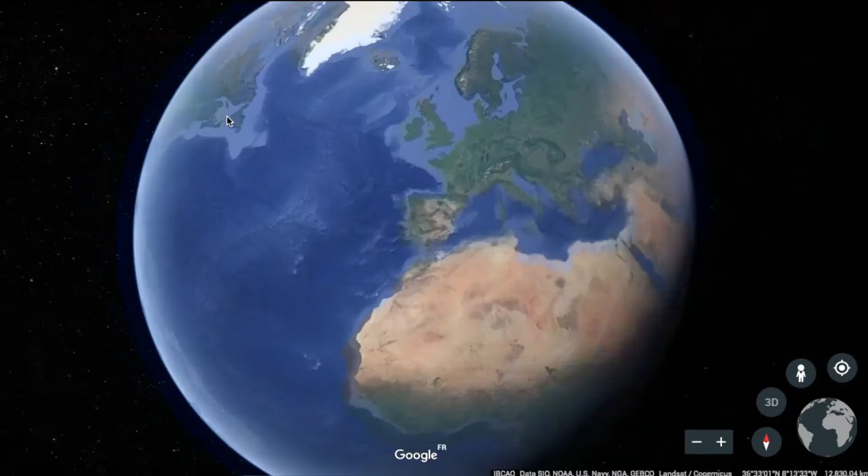My name is Ian Craig. I'm from the University of Pretoria in South Africa, and it gives me great pleasure to introduce our first plenary speaker for IFAC 2017, Professor Iven Mareels. He is the Dean of the School of Engineering at the University of Melbourne.

He obtained his Master's in Electromechanical Engineering from Ghent University in Belgium, and the PhD in Systems Engineering from the Australian National University. He received civil honors for his work in engineering, education and research: in 2013, the Commander in the Order of the Crown from Belgium, and in 2003, the Centenary Medal from Australia. And in addition, he's won a number of awards.

In 2017, just the other night, he received the IFAC Harold Chestnut Textbook Prize. In 2014, he received the IEEE CSS Control Technology Award for work that he's going to talk about this morning. And then in 2013, the Asian Control Association Education Award.

Iven is very closely associated with IFAC. He was the technical board chair and vice president of IFAC for 6 years. He's also an IFAC fellow, an IFAC advisor. And furthermore, he's a fellow of the Academy of Technology, Sciences and Engineering in Australia, the IEEE, and also Engineers Australia. And then furthermore, he's registered as a professional engineer with Engineers Australia.

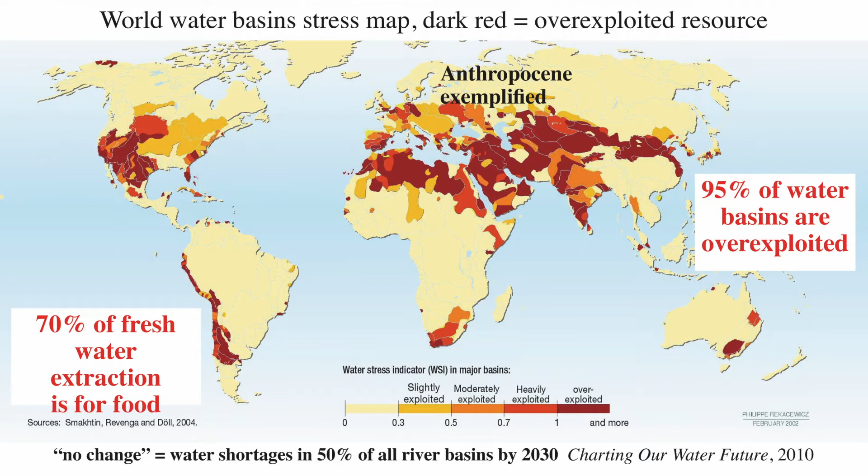The talk today is about this map, essentially. It's a map that represents the water stress in the basins around the world, and the darker the red, the worse you're off. And you can see that there's a rather large amount of red on that map. And if you ever wondered why we sometimes call this era the Anthropocene Age, I think this map more or less tells the story. 95% of all the river basins in the world are being overexploited. Some of them are really overexploited. More than 50% to twice as much water is extracted from them as nature can actually provide.

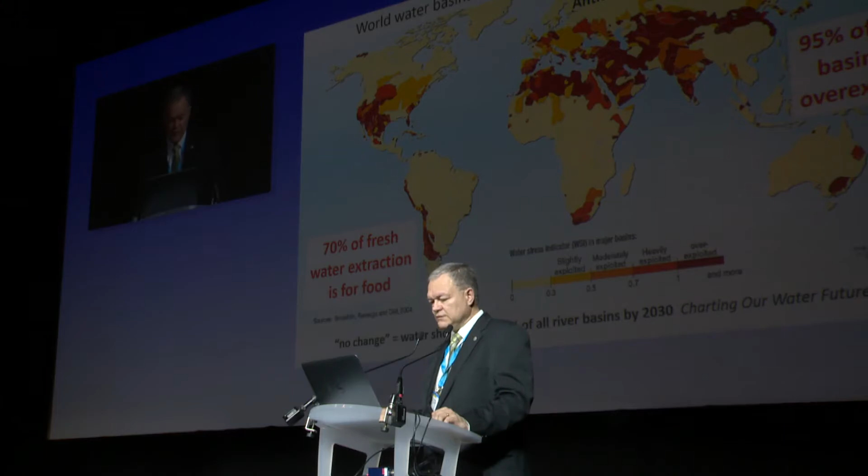Most of that water, actually 70% of that, goes into our food. And so, in a nutshell, if we can't change this picture, we are going to significantly go into trouble. Actually, the 2030 Water Report tells us that about 50% of our river basins will have significant water shortages, and it predicts 50% of the world population to be in the same space as a consequence. So this talk, in a way, is about systems engineering to reduce water stress.

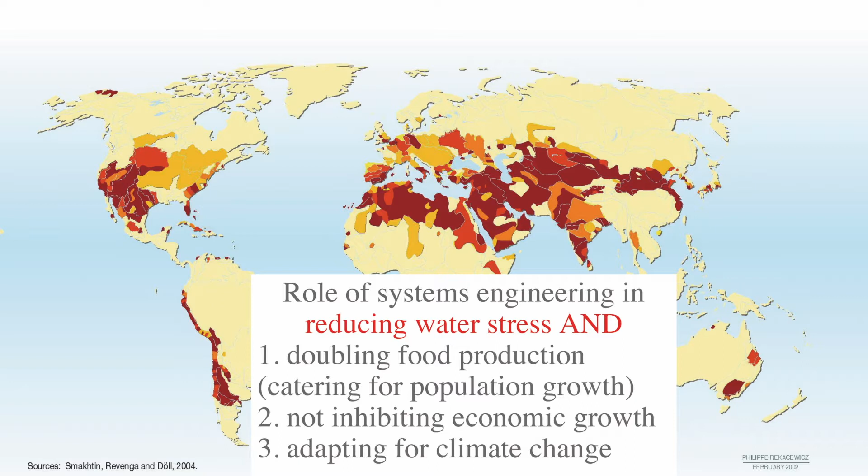But that in itself is a goal that you can never get any money for or be funded for. What you can do is to focus on the reasons why you want the water and reduce the water stress. In the first instance, we want to have twice as much food as what we have now, in large part due to population growth. You want to do that in a way that it doesn't cost the economy too much, otherwise, you impede economic growth and other priorities will take over. And finally, it's very appropriate to think about that. The rain comes from the sky. Sky is influenced by climate change. So how do you adapt and make this whole thing resilient to climate change?

So my key messages for today, if you don't remember anything from the talk except these, would be fantastic, is that actually our system thinking, the feedback and control that we do in our community, can make a difference on the geoscale engineering space. And we can see it as a positive force in the Anthropocene era. A maybe negative message, but a message that is important nevertheless, is that you can't have impact unless you can unlock the productivity key in your era.

And the most exciting, I think, is that we as a community have a most fantastic time in front of us. I think from all the time that I've been with the IFAC community, it's now almost 30 years, this is the most exciting time. The opportunities that we have in front of us to create autonomous behaviors using a combination of sensors, communication systems, computation systems, actuators, and the physical environment, and not to forget the human in the loop, has never been as large as today. And in some small sense, this talk will illustrate what you can do in this context in the area of irrigation and agribusiness.

I'll have a small video to try to introduce you to the topic of irrigation. It's about this area here. I live in Australia, somewhere south, 24 hours flying from here, in this little green area. I think you can, my map, you can't see my mouse. That's interesting.

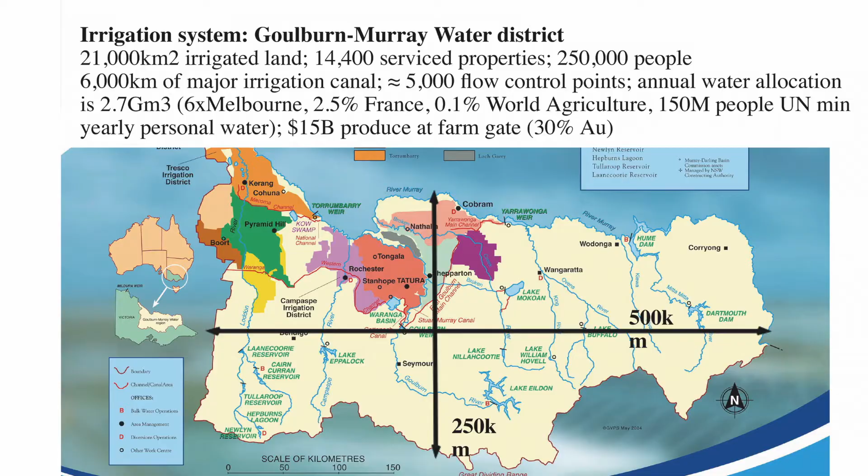6,000 kilometers of irrigation channel. It's a medium-sized system. There are systems with 40,000 kilometers of channel in the world, and it uses about 2.7 gigacubic meters of water a year. That doesn't mean much to me, but it's 6 times the city of Melbourne, about 2.5% of what France uses, and it represents about 0.1% of the world's water agriculture.

Nevertheless, according to the United Nations, you can supply 150 million people with their yearly water supply using that amount of water. And from an economic point of view, it's about 30% of Australia's total produce at farm gate, about $15 billion. So it's about that system that you're going to see a small video that will try to explain what we're talking about.

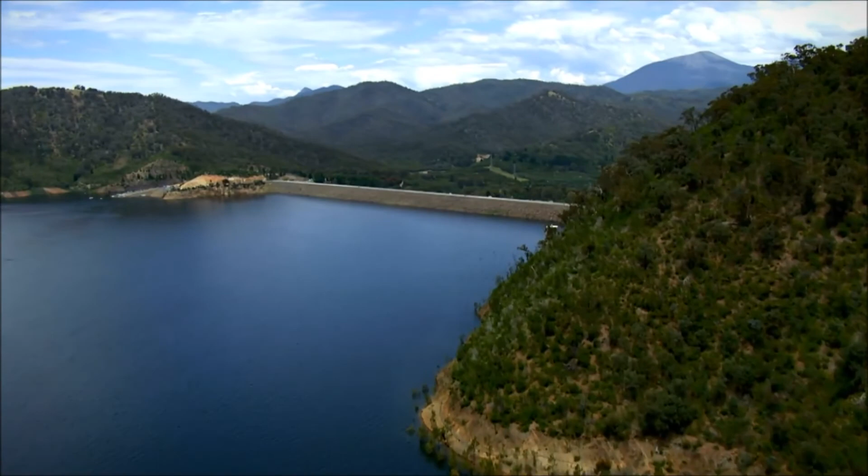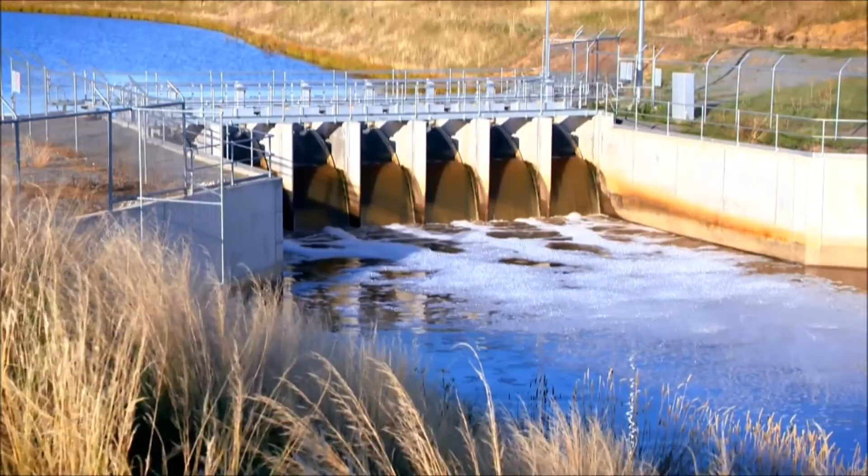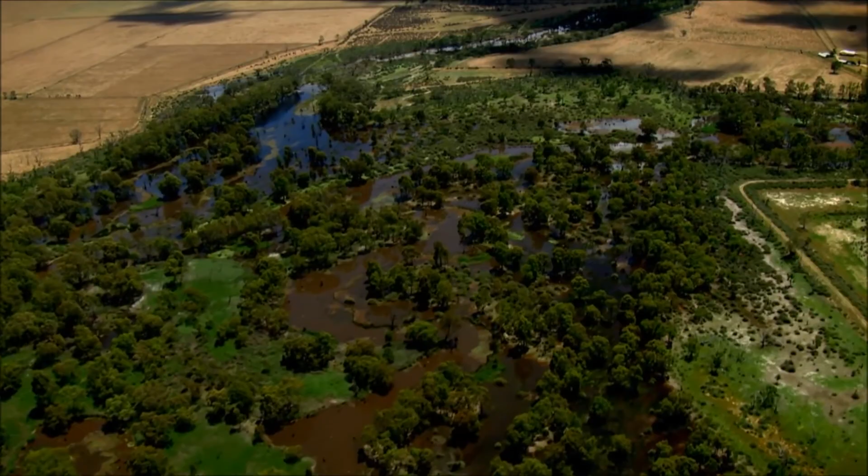Smartwater Technology is revolutionizing the operation and management of open canal irrigation water distribution systems around the world, reducing the massive amounts of water lost in transit from storage to farms. Using the world's limited water resources efficiently is becoming increasingly important as the world faces scarcity in many regions. With 70% of the world's fresh water used for irrigation, authorities are looking to reduce water lost in inefficient irrigation infrastructure. In Australia and around the world, canal automation is being implemented to reduce these losses and secure more water for productive uses. In one of the leading projects of its type, the Northern Victoria Irrigation Renewal Project, or NVIRP, is underway in Australia's Murray-Darling Basin. It will secure the future productivity of Victoria's food bowl irrigated agricultural region, while delivering major environmental benefits.

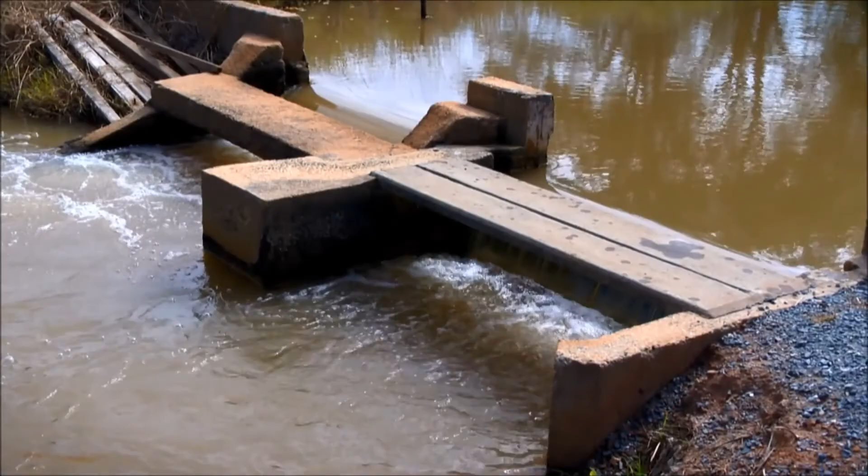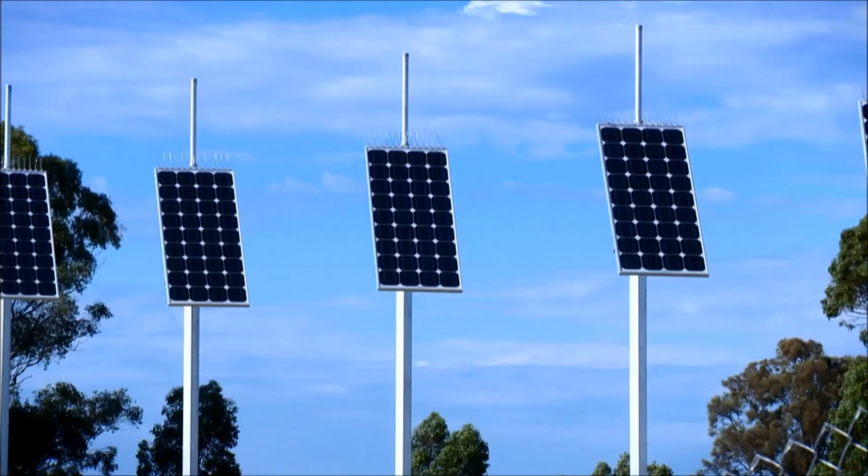The project is automating Goulburn Murray Irrigation District's 6,000 kilometres of canals, and together with targeted remediation and rationalisation, it will see over 425 gigalitres of water saved each year, a figure similar to the amount of water consumed by the City of Melbourne's 3 million inhabitants. Previously, the district was losing massive amounts of water through leakage and seepage, inaccurate metering, and poor control that results from manual operation. It is now being transformed into a modern and efficient supply system that makes the best use of precious water resources.

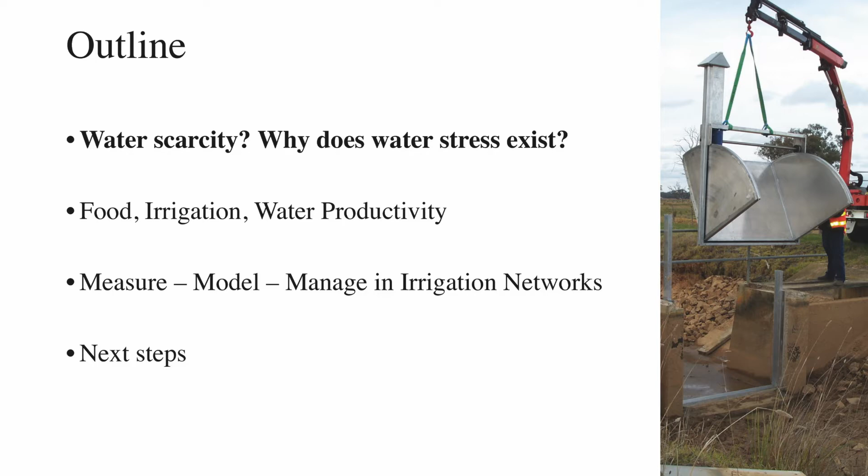So, first of all, I would like to set straight that there is no water scarcity on Earth, so I'll talk a little bit about that. Then we look at what irrigation does and what we can do with irrigation through measure, model, manage, and then maybe look at some next steps as time permits. So first of all, there is plenty of water on Earth. After all, it's called the blue planet. There is no such thing as physical water scarcity.

To just put it in context, if we could only use water once and then throw it away, it couldn't be used again, our society, as it is now, could go on for 10,000 years. And we would not run out of fresh water. And if you had run out of the fresh water, then you could use your brackish water, translate it to fresh water, and then you had enough for another 100 million years. So that's the amount of water that's available.

And given that we never destroy it in normal circumstances, we have plenty of water to work for. So any talk about water scarcity, like what that map suggests, is actually evidence of mismanagement. We take water for granted and we don't invest enough in it. So we see actually economic and regulatory failures in a systemic way.

The other thing to remember is that, of course, this is of the whole world. It's not always easy to get the water from where you want, so spatial and temporal effects are very important. And after all, that's what irrigation is about. It's about changing the temporal vagaries of rain into something that's more reliable, both in space and time. And you want, of course, to look after people. The affluence of people makes a big difference in the way the diet is going to move from vegetarian to more meat diet, and of course, climate change.

The 2030 World Water Group report came out in 2010. It's probably still the main document that indicates the economic failure in the market, and indicates a significant shortage of supply if we continue under the no-change scenario. That's the no-change scenario here. You can see about 4,500 cubic kilometers of water being used, 12% domestic, 18% industrial, 70% agricultural. And that's going to move to about 6,900 cubic kilometers under normal circumstances.

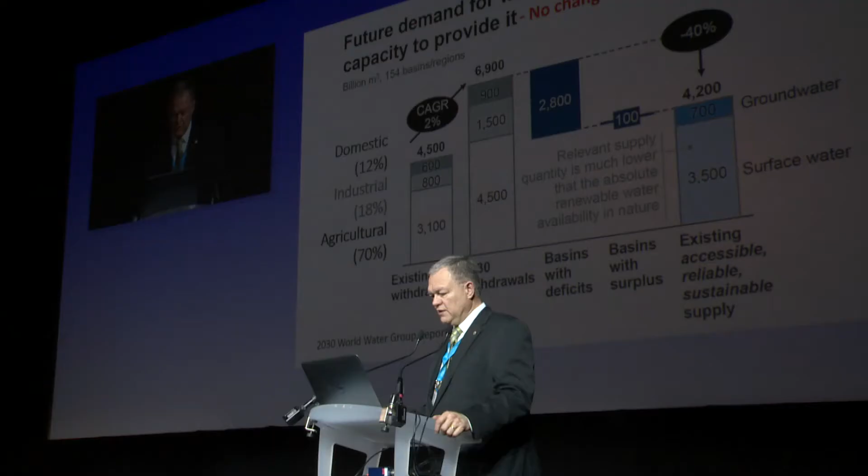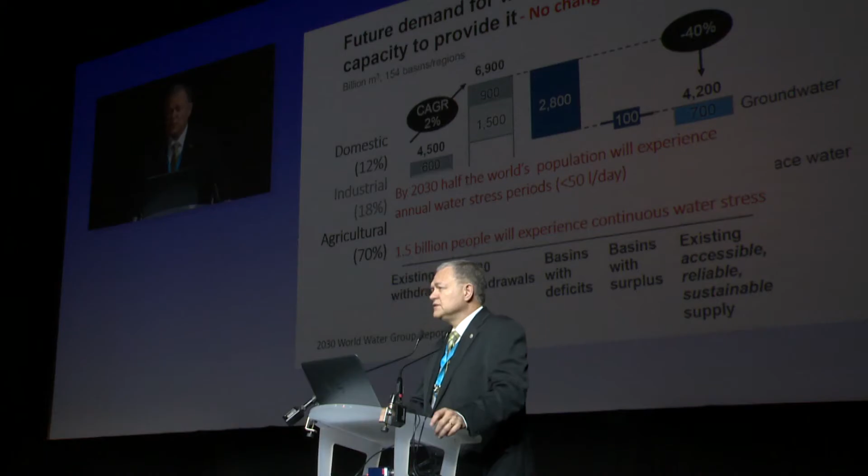So the bad part of that is that by 2030, according to these predictions, half the world's population will experience what is called annual water stress. There are periods of at least a month in duration where the average person will have less than 50 liters per day available. So normally, if you live in New York, you use 500 liters a day. If you live in Melbourne, you use about 300 liters a day. So that's roughly 6 times less than what we are used to in the Western world.

And worse, it makes a mockery of the United Nations millennium goals. At this point in time, we have 1 billion people that have continuous water shortage and water stress. By this model, it would go to 1.5 billion by 2030. So food is the most important part of that, because 70% of all the water extractions from the environment go to food production. And if you look at what we need in food, over the next 25 years, humankind will produce more food than it ever has produced in its entire history.

There are about 3 models that say roughly the same. The IIASA model, which is kind of interesting, it's the International Institute for Applied Systems Analysis. They claim that we need 100% more food per annum and 100% more calories. Babcock at Iowa State University claims it's 100% more food, but not as many calories. He claims more vegetarians than meat eaters than the IIASA model does. And the European Bank is the most optimistic in a way. They think that we can get away with only 60% more food and 60% more calories, and that's in line with the 2030 World Water Group report.

But underlying all of these models is one rather remarkable fact, that we don't have any more water, and so all of this productivity gain in food we have to do with just the amount of water we use today. And that has never happened in the history of our planet. So the question is, is it feasible, or is it just wishful thinking? Well, luckily, nobody really cared about water. So the opportunities are large.

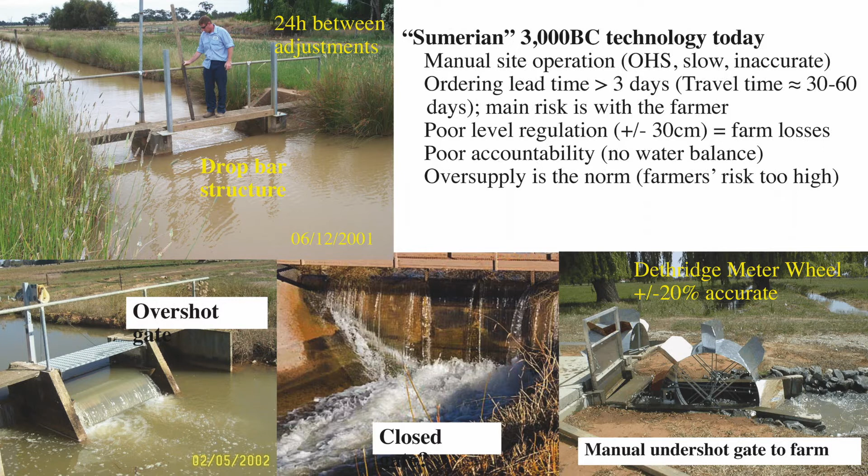And that's related to the fact that these systems are large. It takes a drop of water coming from a dam to your farm 30, 60 days in cases, sometimes 3 months. So despite the fact we've reduced the risk, and that's why we build the irrigation system, the risk remains with the farmer.

On top of that, most systems have very poor level regulation. That is bad because if there is too much water in the channels, because it is gravity fed, the water flows further and therefore you lose water on your farm. It actually goes to the drain rather than on the farm. And if you don't have enough water, it doesn't go far enough and you get mud holes on your farm rather than a nicely spread out farm. So level regulation is actually the most important quality of service that you have to do in flood irrigation.

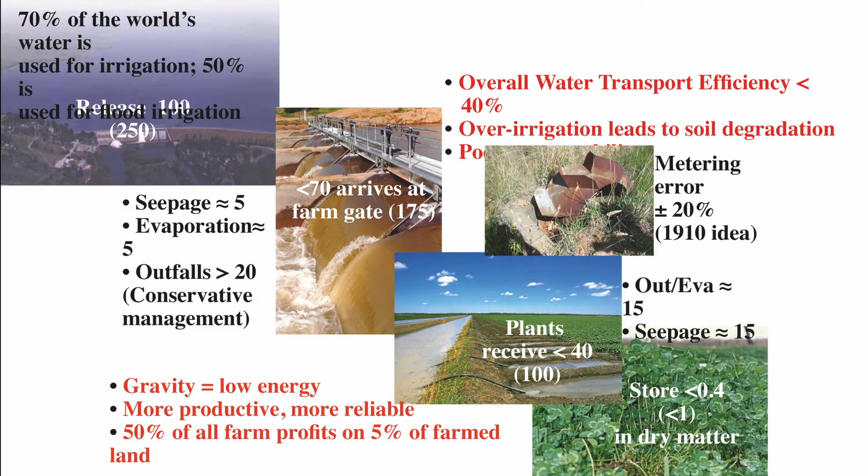And then nobody really knows how much water is in these systems. So there's very poor accountability, and you get this fighting between ecologists and farmers non-stop as a consequence. So in a nutshell, if you look at the top system, you take some water out of a dam, say 100 units of water, and less than 70, and I'm optimistic here because in most countries it's less than 30, arrives at the gate of the farm. And then because we don't time it properly, the farmer loses another 30% at least, so we roughly get 40% of the water to the plants.

And then a plant can only store about 1% of that water due to the normal cycle of breathing, essentially. That's how we actually get our water into our food and our clothing. We're doing it that way because it doesn't cost us any energy, it's very cheap, the sun does all the heavy lifting, and because of this mechanism, we do have more reliable water supply and therefore better productivity. In fact, across the world, 50% of all farm profit comes from only 5% of the farm land, and that 5% is the irrigated land.

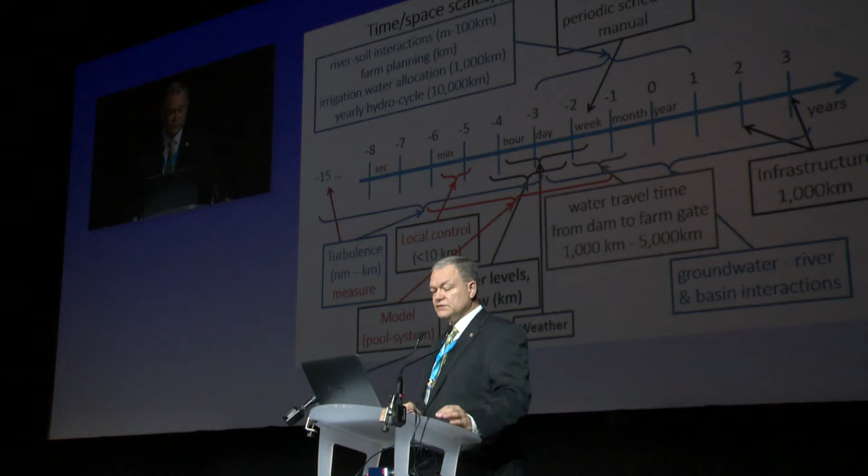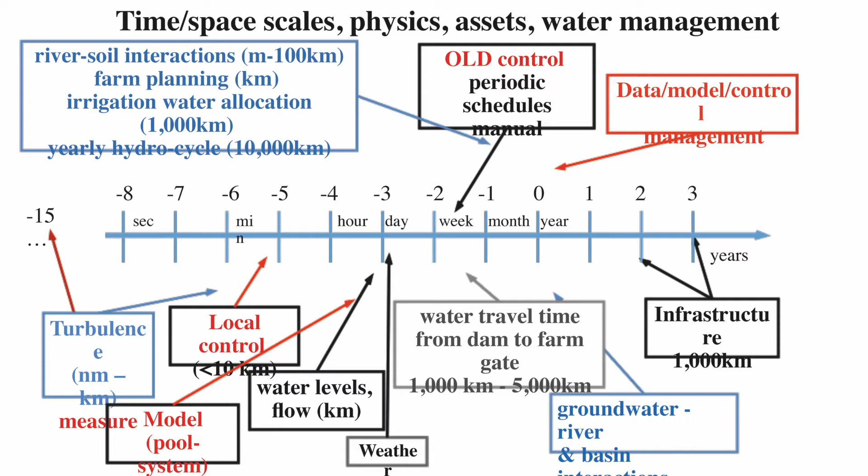And our control strategy will be to focus on the water level regulation and get that right, and that is intervention in the order of minutes, essentially. So all this tells you basically that there's opportunity here for us to do something. And then we have to manage it all and make results out of it on a long-term basis, and for management it's actually important that we get data-based, evidence-based information about the economics of farming.

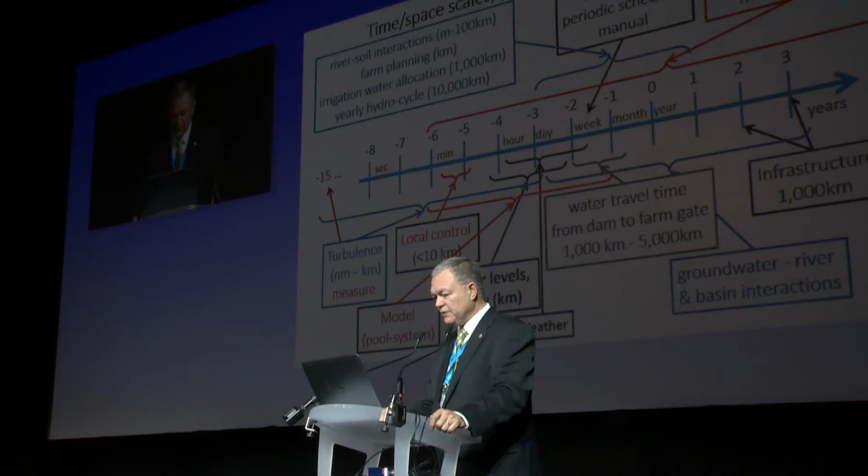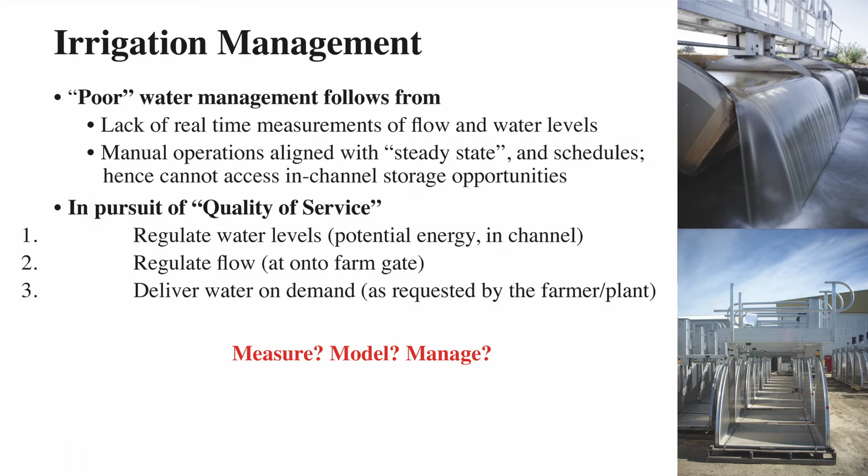So in a nutshell, poor water management actually comes from the fact we don't know where it is, so we don't measure what we want to manage. And we have manual operations that look at steady state rather than at dynamics. So we can never take an opportunity like what is in storage in the channel and make it available to us, because there is simply no control to make it relevant.

What we want to do is regulate the water level so that the farmer has the right amount of water on his farm and doesn't lose it. We want to regulate the flow from the channel into the farm gate, and that's particularly important when the farmer has already invested in pumping infrastructure. And we want to, most importantly, give the water when the plants need it. So I would call that watering on demand, not on a schedule basis. And that's what we're going to try to achieve.

For that, we have to bring in some new measurement devices to make this work. And our team has worked on these gates that are both an actuator, we can close them, change the flow, and as well a relatively accurate flow and level sensor. It's self-calibrating because these things are installed in farming environments, not necessarily a laboratory environment. So there's a lot of thinking that goes in there to make sure that what it measures is actually what you think you're measuring, and that it actually also actuates the way you think it's actuating.

A nice feature of it is that the gain of the controller is super linear, which means that big control actions come a little bit easier than small control actions, which is an important thing because irrigation channels often run at close to full capacity. And a big issue for control will be that these systems are saturating both above and below. You can only get a gate open or close it, and in between, of course.

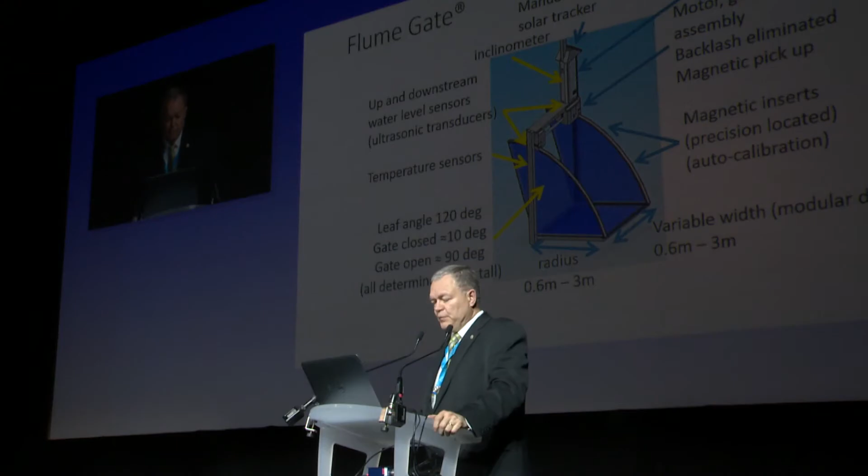In itself, the gate has a lot of measurements for water levels, downstream and upstream. You have temperature sensors for compensating for expansion and temperature effects. You measure extremely accurately the position of the gate, because in the end the flow is a function of the geometry of that gate and the way that the flow operates. And there are quite a few extra devices there to help us eliminate any backlash in the gearbox, etc., to make sure that when we position the gate, we know that we position it the way we wanted it to be positioned.

The ultrasonic, and that's where the very high frequency effects come. In order to measure the water levels, we use ultrasonics, 4 megahertz transducers. We use them left and right of the gate, so there's a bit of redundancy. We can lose a few sensors, but also the redundancy helps us in general to make sure that we know whether the gate is positioned straight or inclines to the left or the right, because that will tell us something about how those measurements work. And then we can compensate for it.

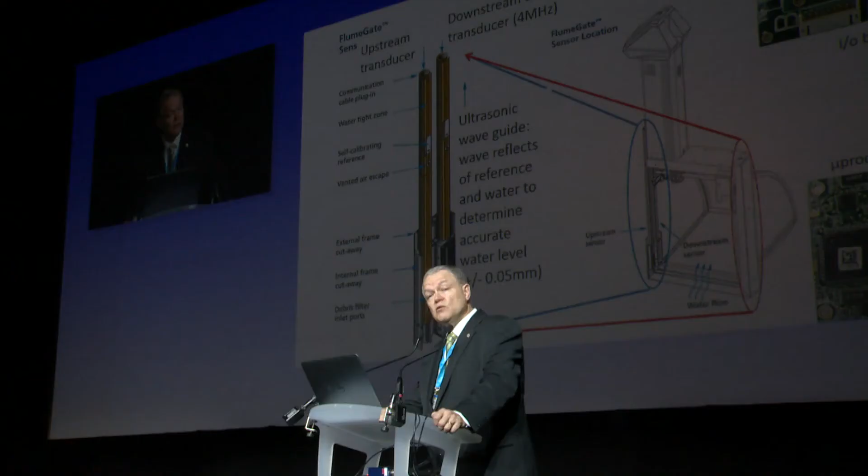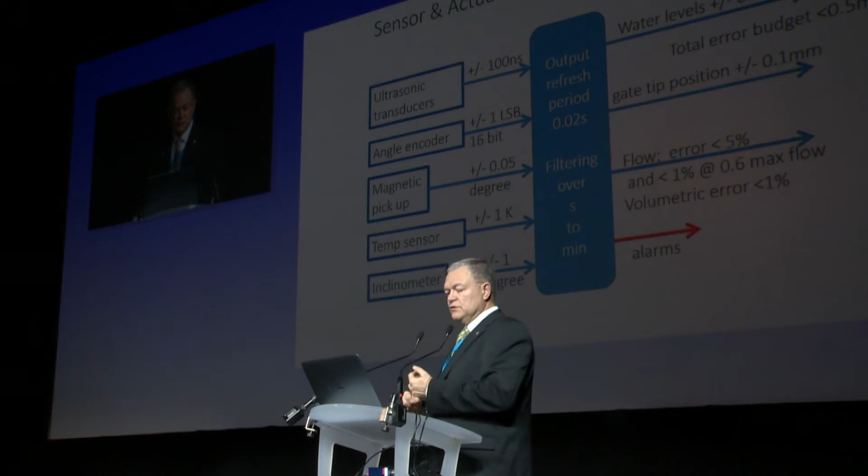And we also compensate for the temperature effect in the speed of sound and so on, in order to make it work. And in the end, we have to make it work to about 0.1 of a millimeter accuracy for the water levels, and that's after we take waves out and things like that, for the average. So we have ultrasonic transducers, angle encoders, magnetic pickups to know that the gate is actually working the way we think it should be working, temperature sensors, inclinometers, and they're just the devices that we use for the actual flow measurements and for the level regulation.

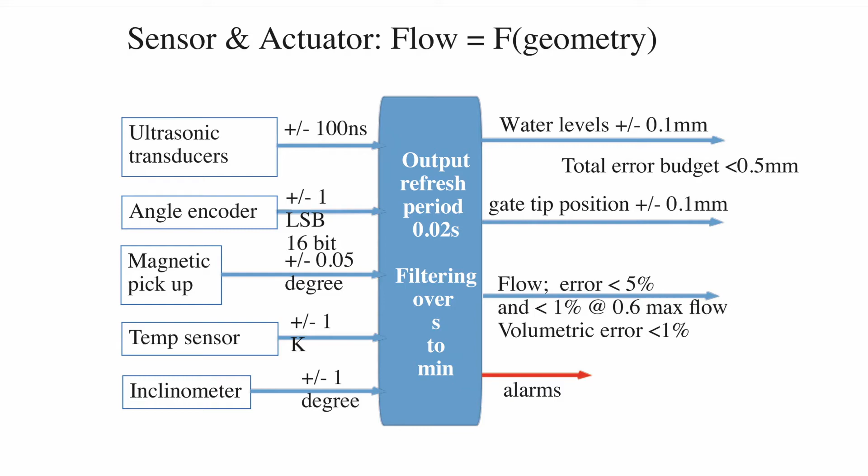There are many more variables that we keep track of with respect to the energy in the battery and the solar radiation that we use also for farming advice. In the end, we can get the flow level to within 5% across the full range, and about 1% or less above 0.6 of the maximum flow rating, which is actually the place where we normally operate. There are all sorts of alarms when things go wrong, because with so many gates in operation, the fact that about 4 or 5% of your gates are having errors or alarming is not unusual.

Once you have that data, you can start thinking about what you should model and how you should model it. And in principle, you go to your textbook and you will pick up the Saint-Venant equations, the shallow water equations. But when you go there, it becomes all a bit complicated and difficult to implement in the field, especially if you start thinking about having to link about 10,000 Saint-Venant equations with all the boundary conditions we don't know, etc. So in the end, we do some gray box modeling that we adaptively track during seasons to make sure that our parameters roughly reflect what is happening.

And what we try to model is essentially the preservation of the potential energy, or if you want, the mass balance equation, roughly the same in this case. And we also look after the first wave, because we don't want waves. Waves are the pest on these channels. They cause all sorts of troubles for maintenance, but they also cause losses that we don't want. So we want to know what the waves are, and we want to avoid them.

We have a bit of a delay on each of these channels, so that is normal, because when we open a gate, the inflow into the next channel, the next pool, will actually affect the downstream water level with a certain delay, which is related to the wave speed on the channels. And we have a relationship between the length and the depth of the channel that tells us about the delay. Unfortunately, nobody knows what those channels really are. The surveying of these channels is probably more than 100 years old. In the meantime, things have changed a little bit. So we have to track that adaptively in order to make this work for us.

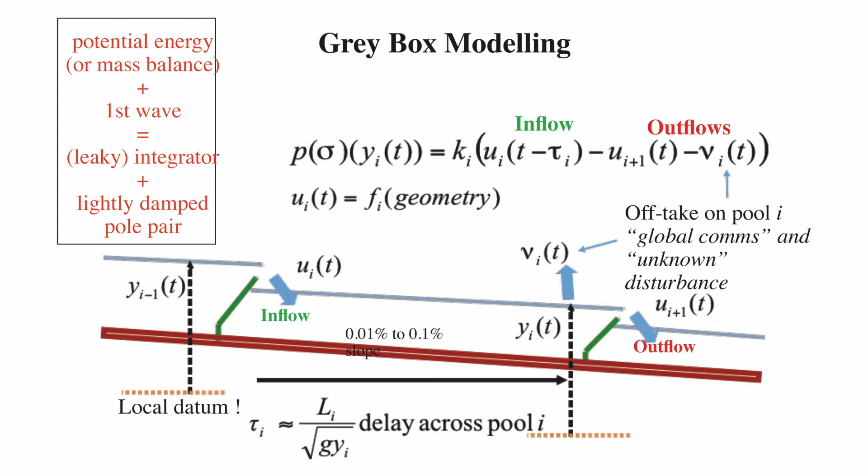So the model here consists of, on the left-hand side, the i minus first pool, if you like. We know what the water level is there. We know what the flow is going into the next pool. Then we have a pool where we measure essentially the downstream water level. And that's the water level we want to control and regulate, because there is going to be the main offtakes for the farms, most likely, and also the main offtake for other channels, if there are other channels taking off. In the end, you get almost a linear model if you linearize the gates, which are nonlinear objects, the flow out of the system.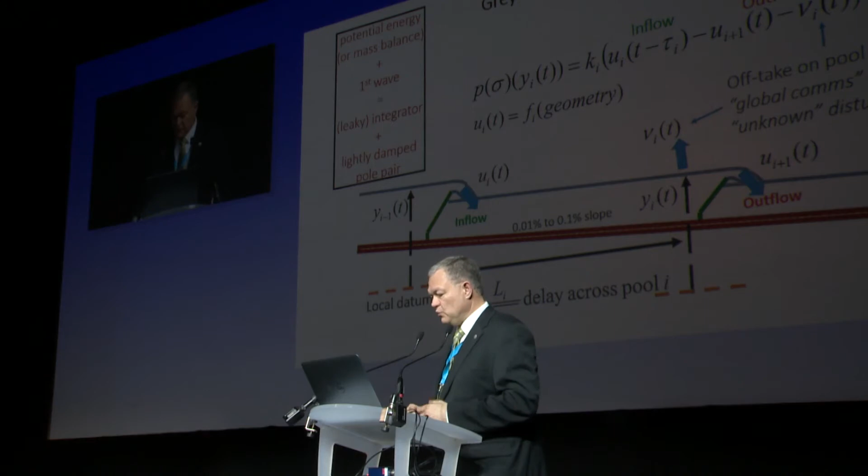And the other thing that you learn, of course, is that there is a significant disturbance, because farmers are taking water out, but you're also losing water out of the channel through evaporation and seepage, and those things are not easily measured. We can derive them, but they're not immediately available, and therefore we treat them as disturbances. Then you have to put them all together. If you talk about a system that's 6,000 kilometers long, you roughly end up with around 10,000 of these pools, and you concatenate them according to the topology of the network.

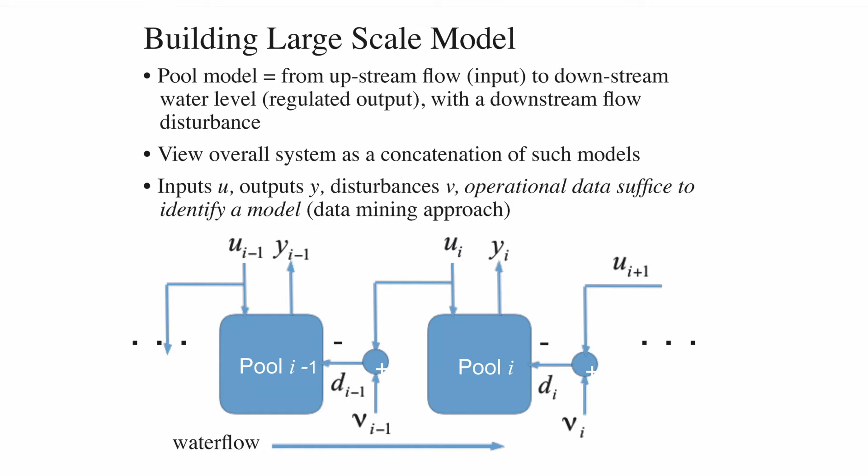And essentially, you get all these variables, the upstream gates, the downstream water levels you want to control, and they have a disturbance due to the outflow of the pool, of course, and the offtakes that come in. And that's your unit, essentially, and that's the unit we have concentrated on. We have made a choice. We have taken the upstream gate and controlled the downstream water level.

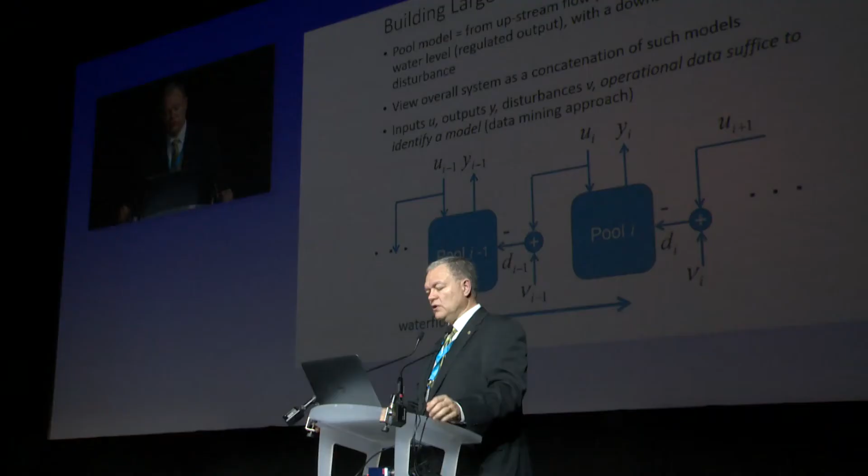It's a choice that we have evaluated why it's a good choice, but in principle, that pairing of variables is an open choice for you in your control environment. We have just chosen this one because we believe it works reasonably well. Then we control that gate, the upstream gate, in order to maintain the water level downstream, and that water level comes from somewhere.

And in principle, it comes from the heuristic that we know how to operate the system, but it's a variable that you can set and we can actually play with, and it would be very interesting to play with that if you want different regimes in your system to be controlled. For example, maybe a flood mode control where you want to let water flow through the system as fast as possible. That will give you a different set point than what you want under irrigation control. That's a global variable.

That has to be set somehow, and it's set in this case because of the vastness through a radio-based IP network. Typically set for a whole season, so we don't change these variables a lot. Once in a while in a season is basically it. Then locally, we need to know information about the downstream gate. So the downstream gate has to talk to the upstream gate, and that also goes through a radio uplink.

It's a very simple communication, doesn't require an awful lot of information exchange, and it's all done event-based. So nothing is done regularly. It's just when something changes, we let the people that need to know know. The advantage of this is that you can retrofit, it can scale well, it's totally decentralized, and the local controller can act as a standalone controller, knowing what it has to do, regulating a flow, given disturbances that come into play onto it.

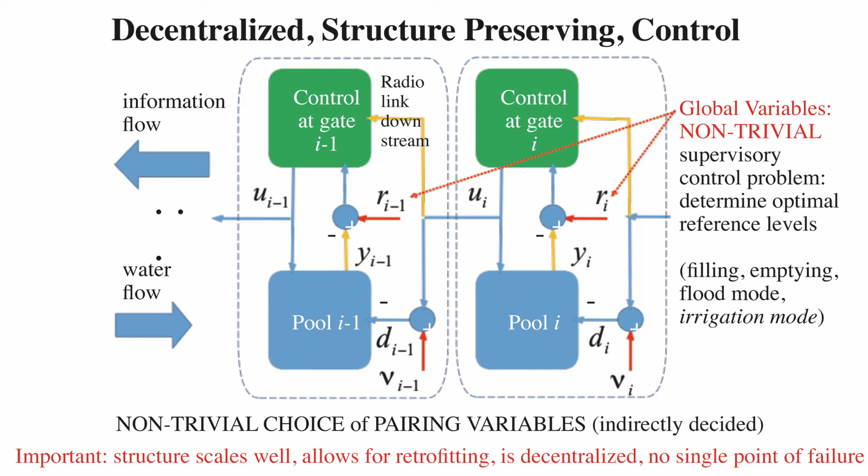The supervisory control problem of setting the levels and maybe the flows at the gate of the offtakes is a more difficult problem, and that is typically approached as an MPC problem in our thinking, but often at present in management it is done basically by heuristics. So the other control variables here, the ones on the bottom, are basically offtakes that the farmers have ordered, and they are global variables, and they have to be communicated to a global network, and very often much more frequently than the set points themselves.

If you don't have that available, if you don't get that communication, the controller will simply take it as a disturbance and then act on it through the level controller itself. Inside that box, we have basically two controllers. One that looks at the water level, that's the main one. He wants to make sure that the farmer gets the right water level. That's the level controller. And then we have a flow controller, one that knows what the next gate needs in terms of flow and then ensures that at least that flow is passed through the local gate so that we can satisfy downstream demand.

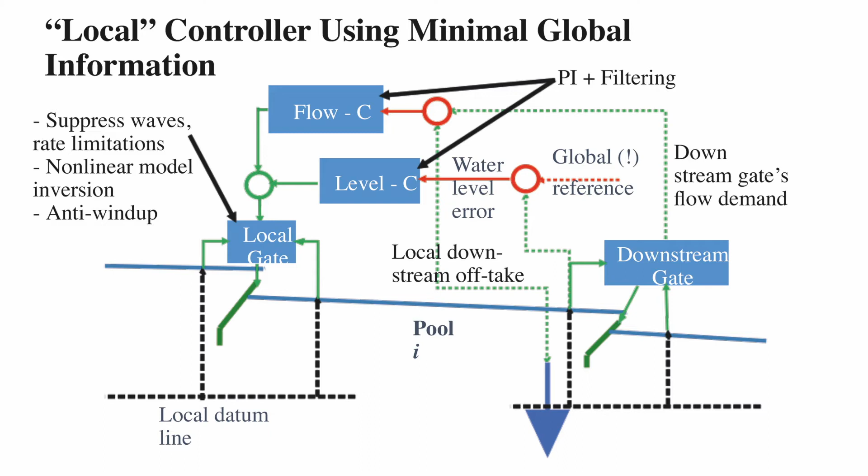The green dotted lines indicate local communications. The red dotted line means global communications. And in this case, I have basically taken the offtake information from the local pool information, so without having the global communication. So there's a bypass, if you like, but it's a slower bypass. If you don't know what the farmer is doing, you can always measure what the farmer is doing through the local system, and that's the way it's mainly implemented.

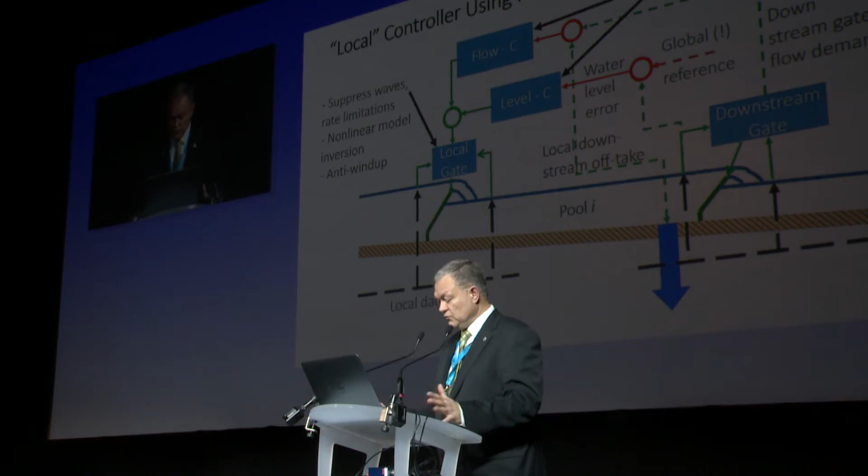At each local gate, because it's a saturating actuator, you want, of course, some anti-windup. You do some nonlinear model inversion because the gate is a nonlinear device. And you also do suppression of waves and rate limitation in general so that nothing moves too fast on these rather slow systems. So far, so good. That seems to be reasonably working, and we can do reasonable designs with these.

But not everything is a tree. Canals branch, canals join. And then you have to make some more choices. And if you want to make all those choices, you very quickly get into a combinatorially hard problem. And what typically is done by management is that they take a heuristic approach and they cut these NP-hard problems and say, well, we'll take this as a slave and this as a master.

And that leads to suboptimal solutions in many cases and some problems that are still not worked out. So this whole problem of topology, how you select topology and how you have variables paired, remains an open and interesting problem, and I think in most large-scale systems actually an important problem.

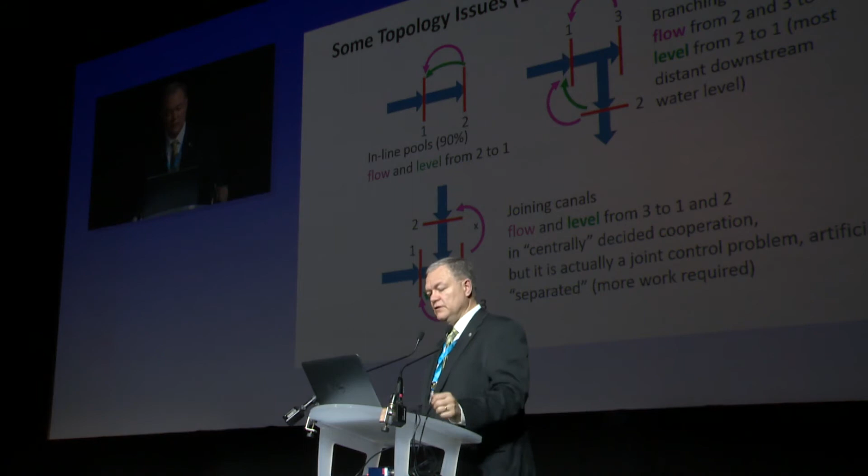Even in grid control, the same problem occurs, and we have some heuristics by which management approaches this problem. Doing this more properly, more scientifically, is an open problem. The choices that you make would like to approach a global solution, but for the moment, nobody knows what a global solution is, and therefore we don't have proper choices.

So from an overall control design, there are actually three levels of control. One, on the long time scale, implemented manually, is a managing controller that checks whether everything is working well. Typically you do that over a season, and then you adapt your model and your control topology as required to push your assets harder and get better water saving, because that's your main target as manager.

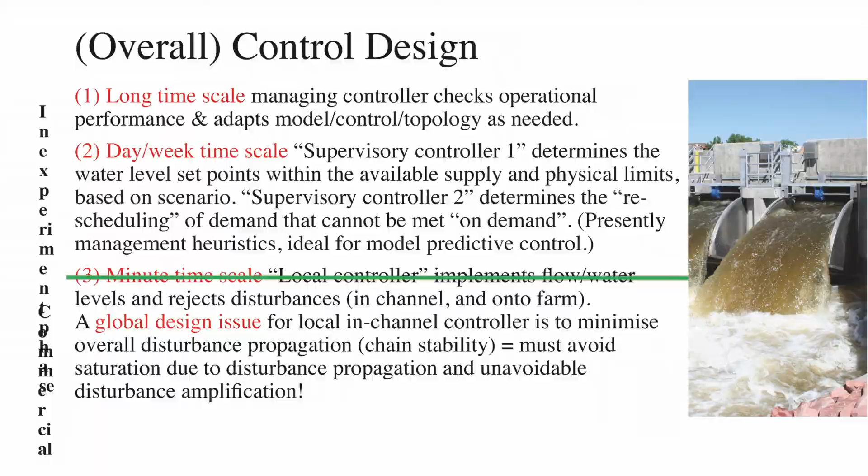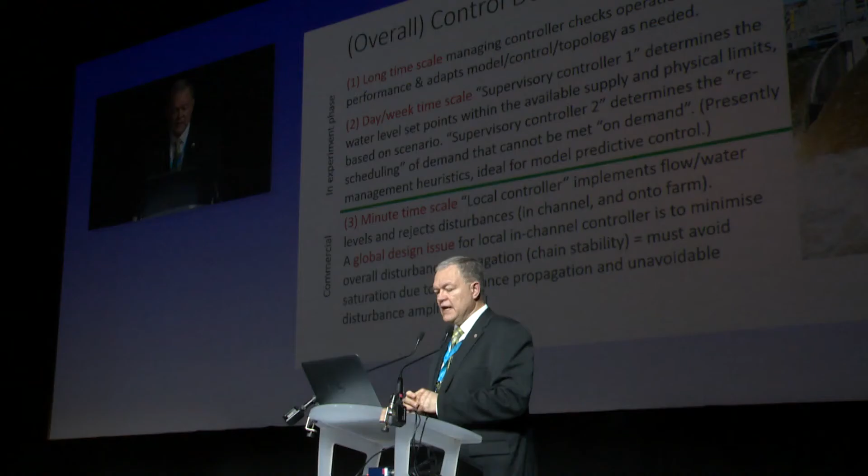In the middle is a controller that you would like to have implemented, we have worked on, but we actually have not in the field. The supervisory controller plays with the water level set points and adjusts them to the scenario of operations of the channels, whether it is flood control, irrigation, or a rejection, like filling or emptying the channels. That's not implemented, that's all heuristics at this point in time.

And the other one that is quite interesting, also not implemented at this point, partly because it's not really necessary, although in some systems with heavy use it is becoming very interesting, is rescheduling. So how can you delay demand in order to meet the supply? For the moment, we try to meet demand just by stochastic first come, first served, and an economic argument that if there's congestion, we put the price of the water up, which is basically what is happening right now. And so people drop out of the market and make everything workable again.

And that is implemented now. But there are better ways of doing that. We'd have higher water savings opportunity or higher economic gain, rather than using a price.

And then finally, the bottom level controller is the control that is implemented in the systems I'm talking about. That is where you do the flow control on the gate to the farm and the water level control inside the channels. And there's only one design issue that is really cumbersome in that space, one that comes from scaling: you have a chain stability problem. If you push somewhere, there is an instability.

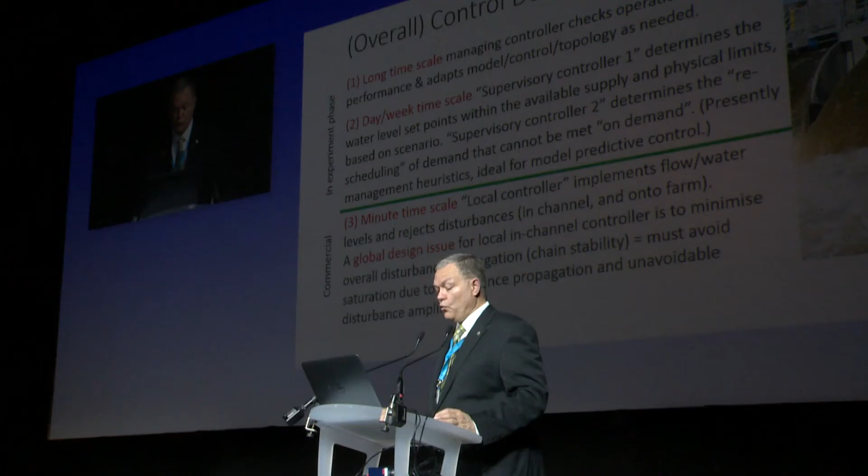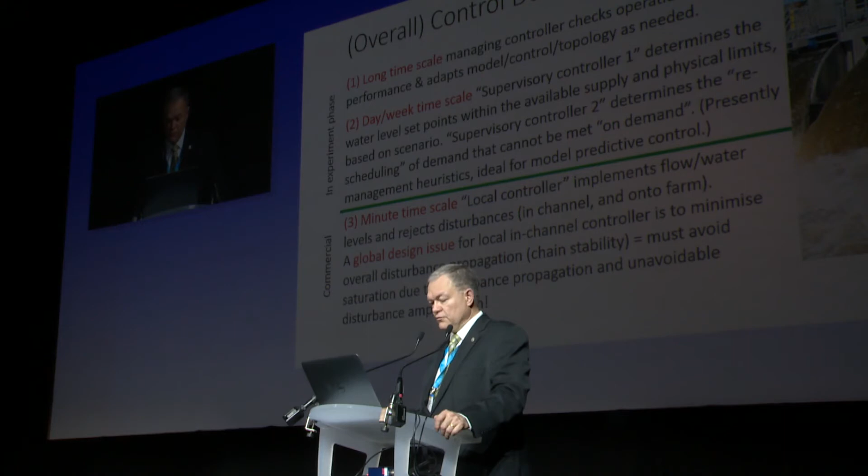The gates will amplify that instability by the simple fact that you have an integrator and a delay, and therefore you always have a gain amplification around DC. So you always have to worry about that problem, and you do have chain instability problems that you have to overcome, but for that you can use design rules and heuristic rules that allow you to avoid that.

So bring it all together, you get an Internet of Things for water management, a SCADA system that we've integrated all the way from the downstream water controllers to the management and the accounts of the water pricing and everything else. It has the sensors, the actuators, the wireless IP network. You have management and the farmers all interacting with it.

In the end, it's a fairly large software system, about 70,000 function calls. Just to put it in comparison, that's about 50% of a SAP system, about 100 times more complicated than the Windows operating system sitting on my computer here. Not to burst our bubble, but less than 1,000 function calls are to do with control, signal processing, and modeling. The rest are basically the accounting and the asset management things.

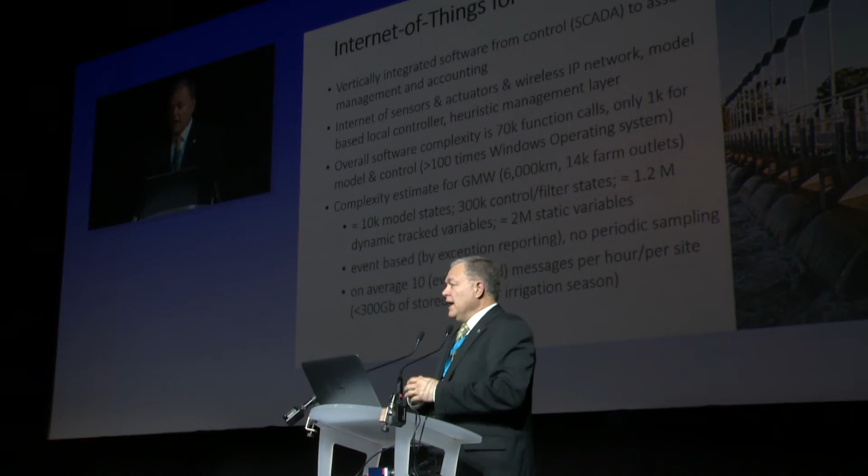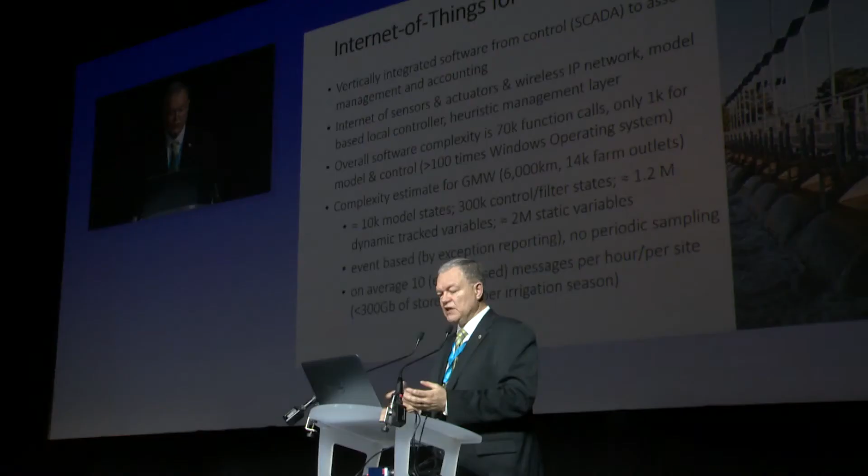Despite the fact that it's called a large data system, it actually is reasonably easy to control. In the end, Goulburn Murray Water has about 10,000 states, about 300,000 control states. We track about 1.2 million dynamic variables and about 2 million static variables. They can change over a season, but not faster than that. So 3 million variables, say, and the dynamic variables get roughly 10 events an hour. So with 300 gigabytes of data, you're done for a whole season.

It's not much, right? So you can easily cope with that, and you can manage an entire system with relatively good information you never had before. And how it works is a bit like this.

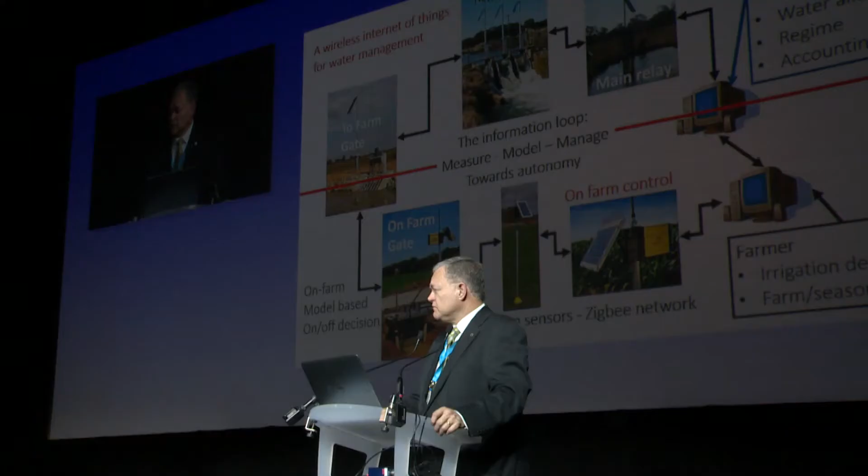The farmer on your bottom right can make a decision to irrigate. You will ask the question. The HQ will compute whether that question is relevant, can be met, if the farmer can get the price that he is interested in. If it's not possible, they will tell him what the price is, at which time the farmer can decide to accept or reject the price. Or if the farmer insists that it's part of his priority allocation, the system will then go back and seek out when it can be implemented.

It basically runs the model forward in time, fits in the farmer's request, and typically within 20 milliseconds, the farmer will get an answer on when their water is available. And for 95% of the farmers' requests, this has turned out to be less than 2 hours. And you have to compare that to a 3-day typical delay time. 2 hours, 1 hour is very common. Very rarely does a farmer have to wait more than 1 day.

Once an order is accepted, the HQ system will set up all the regulators along the channels and command the farm gate to deliver the farmers the water as requested, at the flow requested, for the time requested. That would give you on-time delivery as the farmer requested.

What is really interesting, and I can't talk too much about, is that actually you shouldn't trust the farmer, you should trust the plants. The plants should tell you whether they are thirsty and whether they need water or not. And so on-farm automation to actually determine when is that time that you need water is actually one of the most important contributions to productivity on the farm.

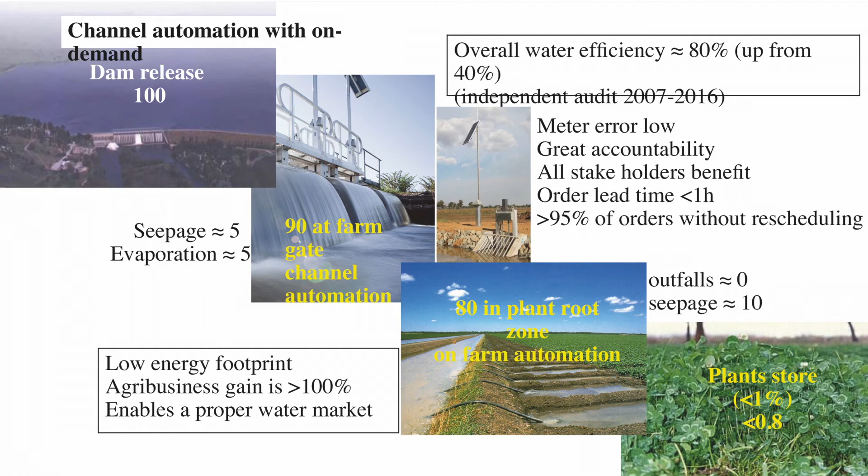And for that, we have farm sensors that look at how much evaporation, what are the plants doing, how much water is available in the root zone, how fast is it disappearing. Combining that together with the model gives the farmer much more control over their farm and actually enables them to grow much more food with the same amount of water.

That automation can be integrated with the channel system, and then we have a totally closed loop, almost autonomous watering system where we have humans in the loop interacting with both: do I buy water or not? And so the financial decision and the management decision, can I do this or not?

If you look at it that way, in principle, we can cut out about half of the losses. Basically, the losses we cannot get rid of, of course, are the seepage losses. Nothing in control can do anything about that, and the evaporation losses. But they amount only to about 10%. So if you release 100 units of water from a dam, about 90 will get to the farm.

And then if the farmer gets the water right as well, then the plants will actually absorb most of it as well, and they will get 80 units of water to the plant root zone, which in principle would give you about 100% productivity gain on the farm. And that's really what we're aiming for.

And the advantage of this system, of course, is the total energy footprint has not changed. So this is purely playing with the timing of water, and a bit of storage in the channels can make a significant difference. When you implement that, here are some of the results.

This is the Coleambally region, it's a smaller region just to the north of the system I've shown you. The red line is what happened before our control implementation was done. So we're running at around 100 gigaliters of losses a year. The allocation there is 300 gigaliters, so they lose about 30% of the water, so it's not a bad region.

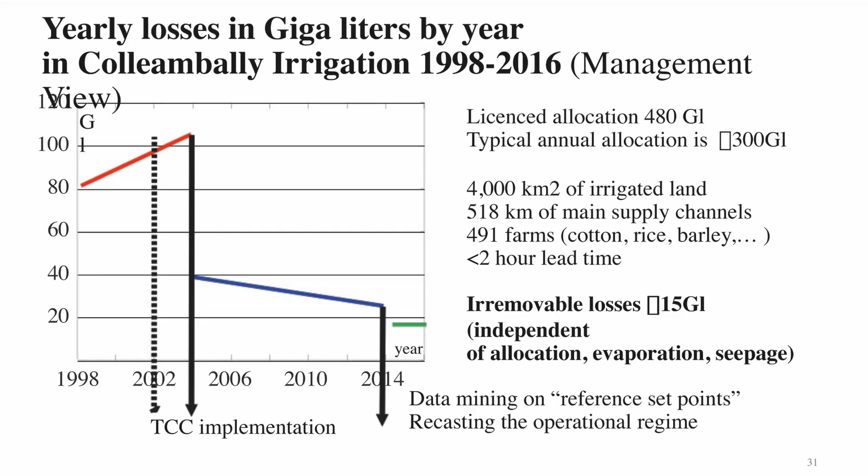Total system, 500 kilometers of channel, 4,000 square kilometers of irrigated land. So it's about 20% of the Murray-Darling system, the Goulburn Murray water system. They have achieved better than 2-hour lead time, and they're now running at 15 gigaliters of water, which is really roughly what evaporation and seepage is, maybe about 10% above that.

Over the years, they have seen continually how to improve their operations, and that's basically the management playing with the water level systems and heuristically adapting their rules of operating the system to get more and more out of it. And they had a major upgrade in 2014, and over the last 3 years now, they have actually run at 17 gigaliters of losses. So a significant improvement for the system, and they claim, probably rightly so, to be the world leaders now in managing a large-scale irrigation region.

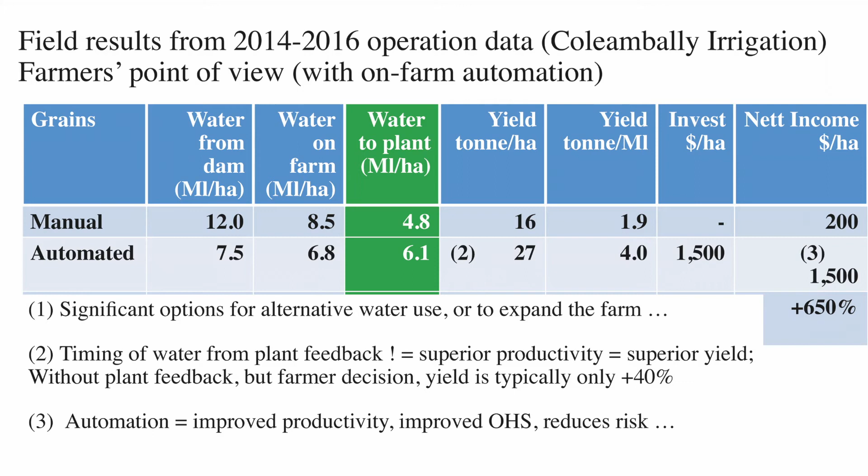The farmers are extremely delighted. That was the management perspective, but the farmers actually are even more delighted. Typically there for the grains, so the rice, the cotton, the rice and the barley, corn, probably in their manual operations, they were extracting about 12 megaliters per hectare. They're now extracting 7.5 megaliters per hectare. That saving remains with management. So the management sees a reduction for their barley growth of 40% in water consumption. The farmer pays for about 20% less, and the plants get about 20% more.

And because of the timing, the yield is dramatically up. So the yield per hectare now in that region is 27 tons per hectare, which is amongst, well, it is the best in Australia. And the yield per megaliter of water is 4 tons of barley for every megaliter of water, which is more than 100% better than what they had before.

So the saving that you get from the dam, you can use for all sorts of things. And management is actively talking to the environmentalists to see what they can do with this water to have other uses. Of course, the farmers say, but hey, wait a moment, I want to pay for that, but I want to grow more rice. Maybe not the right thing to do.

The most important thing for getting the yield right is the timing from plant feedback. So these farmers we're talking about here actually have on-farm automation that tells them how much their rice and how much their barley needs in water, and it's the timing of those sensors that tells us when to arrive water there. And that gives them the superior yield. If you take that out and you compare with the farmers that have not implemented the on-farm automation, they basically are about 40% better off without the automation, but with the automation, they're about 100% better off. So it pays to have the automation on the farm.

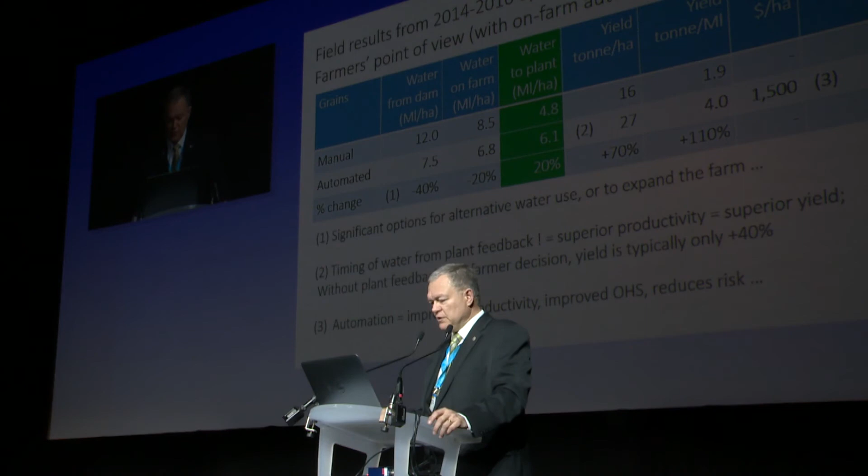And if you ever want to see a difference between open loop control and feedback control that is very simple, here's a very simple example that really shows how feedback makes a difference. And in payback time, the farmer has to invest basically a year of their extra income in order to get the automation going. So it's not a big push to get the farmers into this direction.

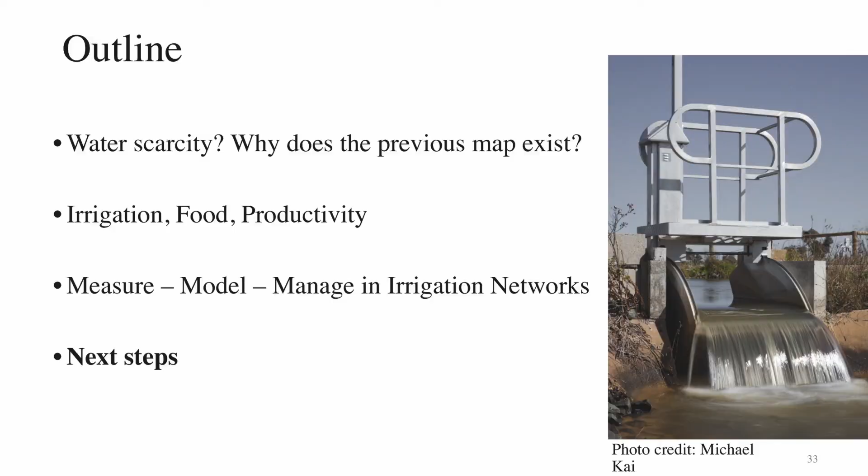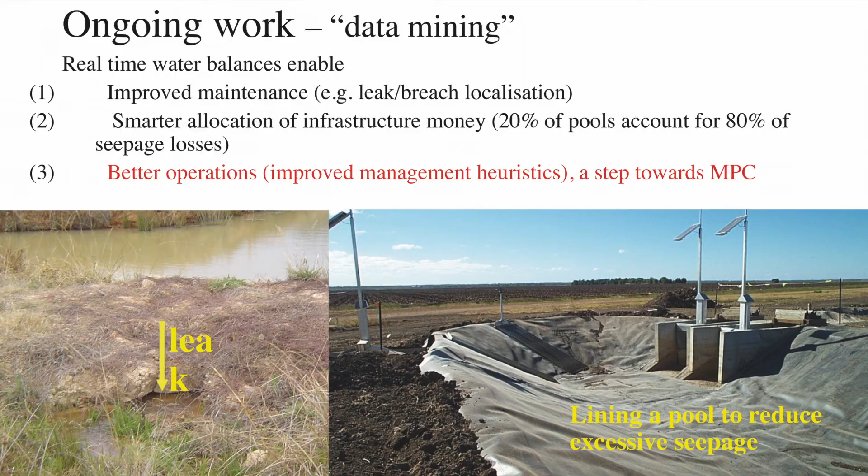Ongoing work, side effects that management very much likes. How to maintain these channels is not a simple task. Leak detection is a big deal. Here you can see a leak that is made by a small animal, a yabby. Farmers will not complain because they get free water. But your management system will know that there is water disappearing. So finding a leak is not such a big deal.

The software, the water balance, actually tells you that the leak is happening on that pool about 3 kilometers long. You can walk it and find the leak readily. So that's one way you can improve leak detection. You can also identify which of the pools are actually giving you the most trouble in terms of losses, and then you can remediate them so you can direct your assets, money, in a better way. And in principle, what we found is that about 20% of the pools account for 80% of the losses, typical 20-80 rule.

The next step of how to use that water better and do real model predictive control is still an argument that we're having with management to see whether we can implement that, and hopefully with Coleambally we can take the next step. My real dream is to do next scale up, basin scale water productivity. We can't do that in many places because of international treaties and so on, but water needs to be managed at the scale of a basin.

That's all your natural rivers together, your groundwater, your dams, all the people that irrigate in there, all the environmental needs, all together under one roof for data management is actually the way to go. And it's time and time told as well in the United Nations reports, World Water Report on this thing, but nobody actually does this.

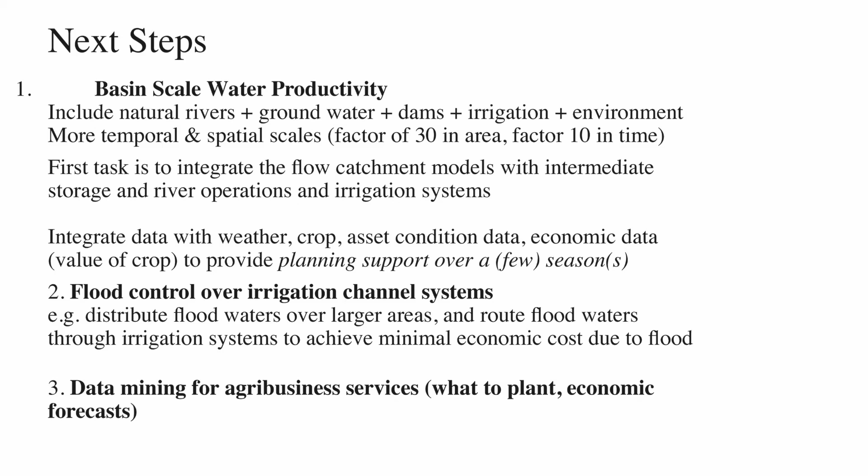And how we can get flow catchment models that are working over very large time periods together with the short-term models that we have and making these operations seamlessly work is a big task that we hopefully will be able to start doing in Australia, at least for one river, the Murray River. The promise there is, again, productivity. We want to use less water. We want more crop. We want to do more per drop, essentially.

And then the Bureau of Meteorology, the economics come into play, and they are going to fund all of this work to be able to manage over this whole thing. And so planning support for crops, which crops would go where you grow them, even at the scale of a farm, because many farms are actually doing monocultures that are not at all the right thing to do for the grounds and the supply of water that they have available. But they don't have the data to make a difference. And so hopefully we can start pulling that all together and make a difference.

Something to do with closer to climate change, flood control. Flood control is becoming a significant issue in many places around the world because our rain patterns are changing. Didn't say much about Belgium and Italy, but in principle there, what is happening with the water is that when the water comes, it comes over short periods of time in big bursts. And that means that your rivers can't cope, so you get more flood problems.

And the question then is, can you use irrigation systems? Not in Belgium because we don't have them, but in Italy, in Thailand, Bangkok, there are many irrigation systems available, and the question is, can't we use those to help us mitigate flood effects and route floodwaters through irrigation systems well in advance of floods, if we can predict floods. So that would make a huge difference. How to implement that is further steps.

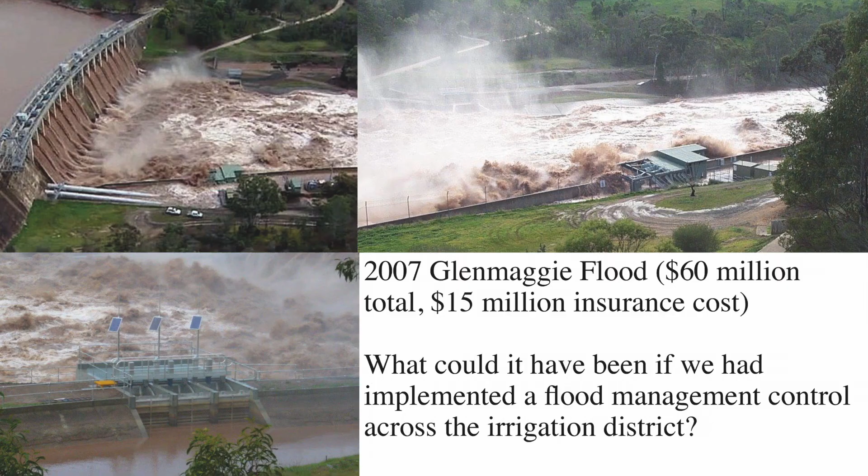At the last minute, they had to open Glenmaggie Dam, and within a few minutes, the pump house that you can see on your right disappeared under the water, and our gates also disappeared. You could just see the radio antenna on top of it. But on your left, you can see if those gates were not working. Actually, there was no irrigation required. It was raining, so why would you irrigate, right?

But those channels can displace an awful lot of water. And if they had been open, and had been open for a while, we could actually disperse the floods over a much larger area than what the riverbanks would allow for. And now the riverbanks were significantly damaged, about $60 million, may not sound much, but that was significant, $15 million by insurance cost. Back of the envelope calculation showed that if we had acted one day earlier to open up the irrigation system, we might have basically avoided this flood altogether in the city. So there is some opportunity there, and we're not using it yet.

One thing that gives me a kick always is when I see the people that get the most benefit out of it, and indulge me for 1 minute, a small video from this farmer who tells a little bit how the automation has changed his life.

The way the system used to be, I had a very limited life in what I was doing because I was virtually watering most of the time. But I see with this system now, I'm hoping for another 10 years of irrigation, which is really something. So, can only happen with a system the likes of this.